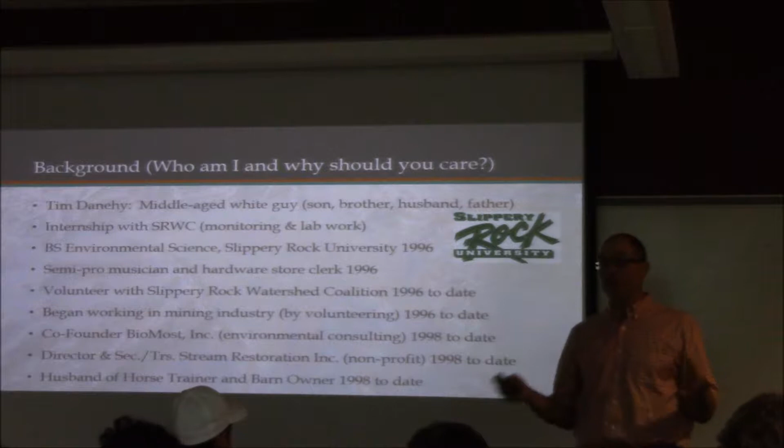I actually began my career by volunteering for a consulting company that filled out mine permits. They were doing work with the Slippery Rock Watershed Coalition, but the majority of their business was mine permit applications, so permit work, paperwork. And I just basically said, hey, I got Wednesdays off from the hardware store. I want to learn about what you guys are doing. Can I just come down and work for free? And so I did.

That gave me experience. It got me out, meeting people, and shortly thereafter they offered me a part-time job. Eventually that turned into a full-time job. My boss, and then my future business partner who I work for, Margaret Dunn, her business partner at the time decided to retire. She looked at me and said, hey, you want to start a business? I said, sure. I was 23 years old. I really didn't have anything to lose, quite literally. So we moved into her basement, bought a computer, and off we went.

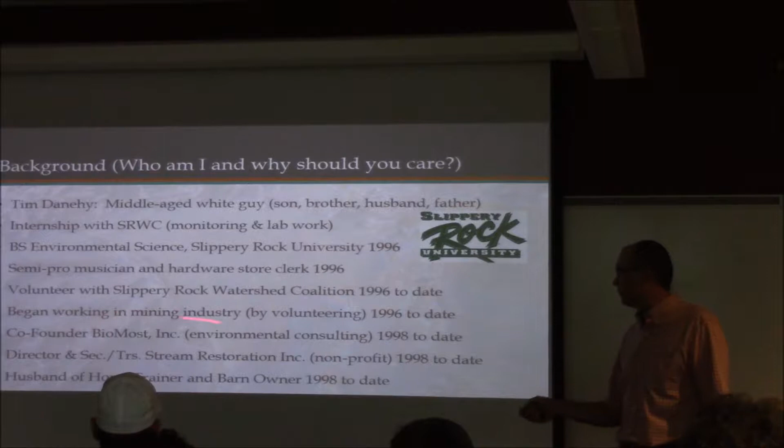I also, at that same time, she had started a nonprofit, Stream Restoration Incorporated. I became a director and secretary-treasurer for Stream Restoration Incorporated, which is SRI. That same year I got married, and my wife's family built a barn on the property, so I built a barn, started a business, got married, all at basically the age of 24. So I kind of started life in a big hurry.

Anyway, so experience, things I have done. This is a picture of our office from a number of years ago. This is myself diligently working at my desk. This is Shaun Busler, who's our biologist. Cliff Denholm, who's another environmental scientist that I went to school with.

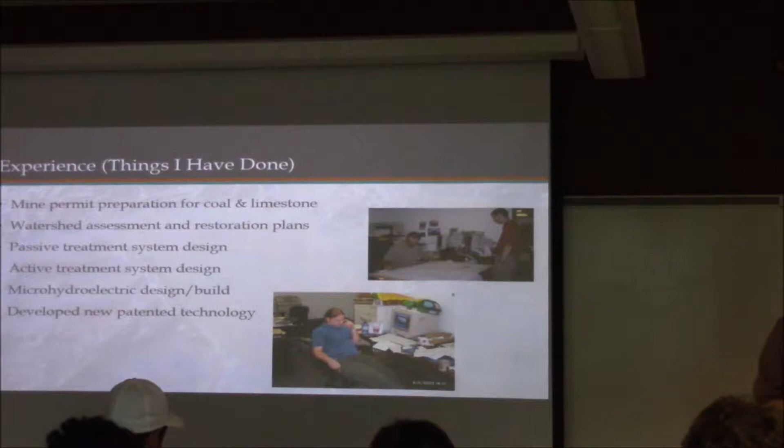We really started our business by doing mine permit preparation for coal and limestone surface mines. Okay, not underground mines. Basically they dig down, expose the coal, dig it out of the ground, and sell it. We were working for some local mining companies, Amerikohl Mining and Quality Aggregates, and as a two-person consulting company initially, that was plenty to do.

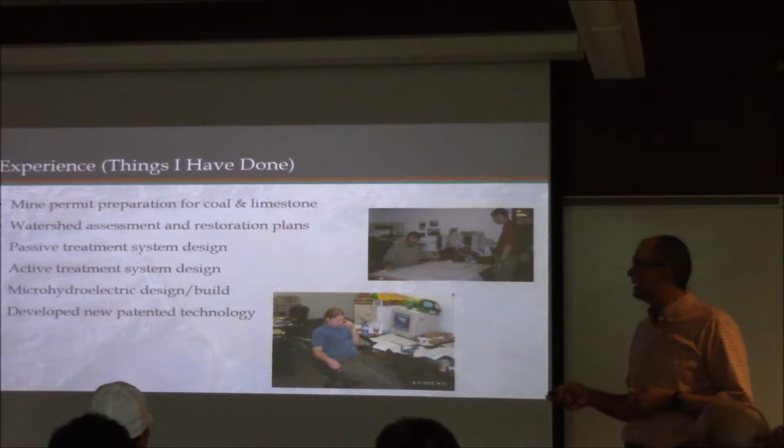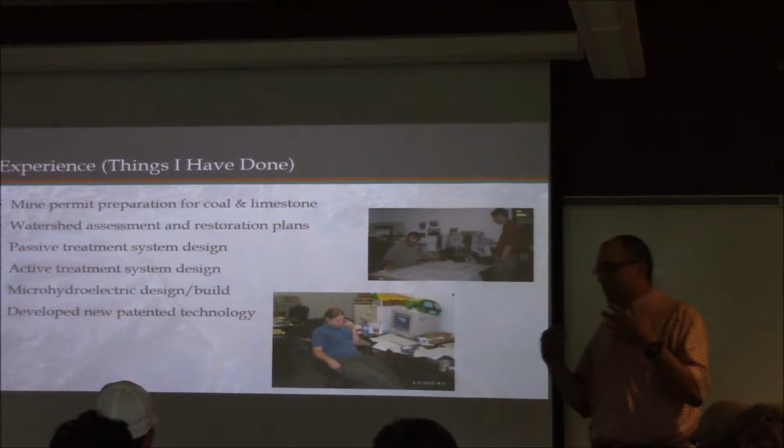Because of the impact of mine drainage, we also got into watershed assessment and restoration plans, passive treatment design, active treatment design, and eventually things kind of snowballed and we got into doing micro hydroelectric design build. Also part of what we do is basically, when we started in this, there was no textbook for passive treatment.

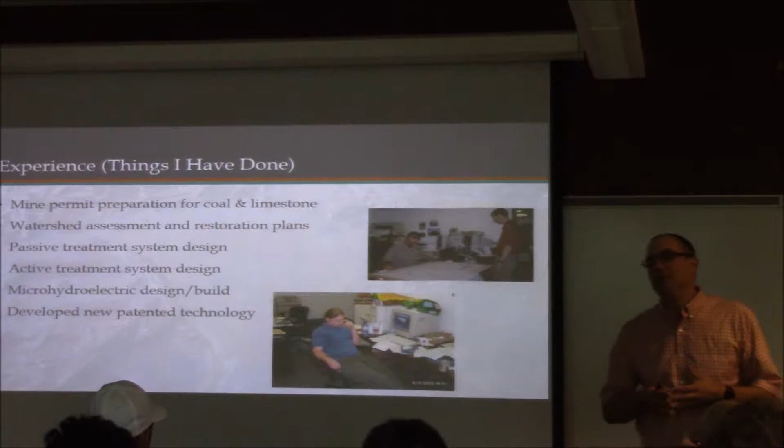I'm glad you're developing those skills in a seminar like this, when you have to listen to people other than your professors to pick up on what they're saying. Just to give you a little flavor, have any of you actually been out onto a mine site anywhere at any time? Kelsey, you can raise your hand. Okay, we got just a handful of people.

When you hear a mine site, some people relate that to something with a dramatic impact on the landscape. And a lot of abandoned mines do have a dramatic impact on the landscape. But in 1977 they passed a law that required surface mine operators to reclaim their mines, and that they would have to be responsible for any bad water that would come off of those mines. So a lot of technology was developed with surface mining, and permits that used to literally just be 3 or 4 pages back in the late 70s, early 80s, are now hundreds and hundreds of pages long.

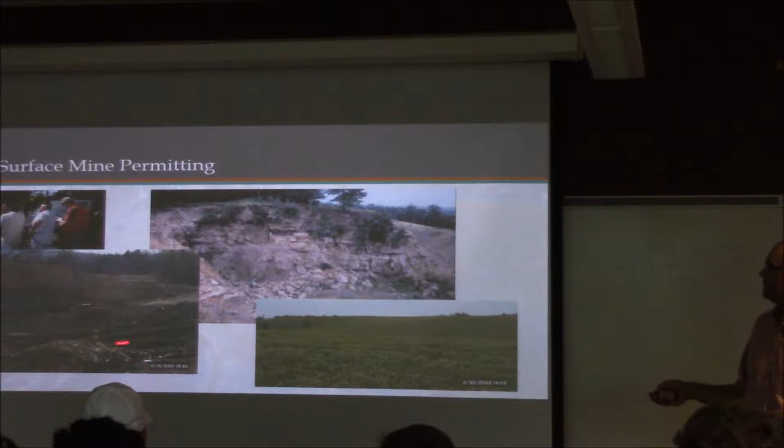So they basically dig down to get to the coal, and here's the mine actually reactivated - you see this is like a D9 bulldozer pushing the dirt out of the way to get down to the coal. Then they pick up the coal and load it on trucks and sell it to a power plant. This is 2001, when they were actively mining it. In 2003, this is reclaimed. If you drive by that site right now, you wouldn't be able to tell it's a surface mine. It just looks like any agricultural field, because the reclamation was done correctly in accordance with current laws and regulations. So just want to give you a flavor for that.

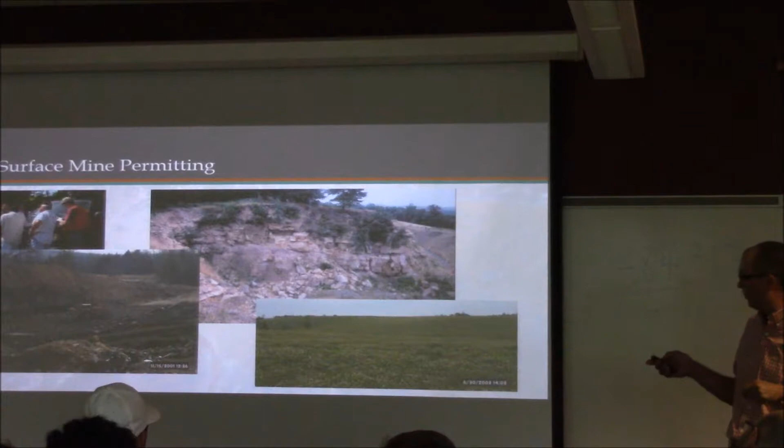Now, what's interesting - you can't quite pick it up, the resolution's not that great - this feature right here on the high wall is kind of unusual. I'll blow it up, I don't think you'll be able to really see it, but that's actually a goat, living on a ledge about 20 feet off the ground on this mine. So that's an actual goat, and he lived on the surface mine. So we destroyed goat habitat when we reclaimed this mine.

So anyway, watershed assessments and restoration plans. Here's another picture of Cliff, and this is Cliff and I out sampling at a site - this is actually out at the AMD and Art site here in Vintondale. We're out taking a look at that passive treatment system, collecting samples. Measurements are important - getting good data. If you're going to engineer something, you have to have a basis for your design. You need to know how much water you have to treat and what the pollutant load is that you have to remove. So measurement is important.

Collecting good data is very, very important, and good flow measurements are very important with a lot of mine drainage design work. There's so many times I have a lot of samples but no flow data, and people ask us to come up with a treatment design, and it's very, very difficult. We've done a number of assessments and restoration plans over the years. The first big one we did was for the Montour Run Watershed Association in 2003. This is another one we did for the federal government, the Blacks Creek Restoration Plan.

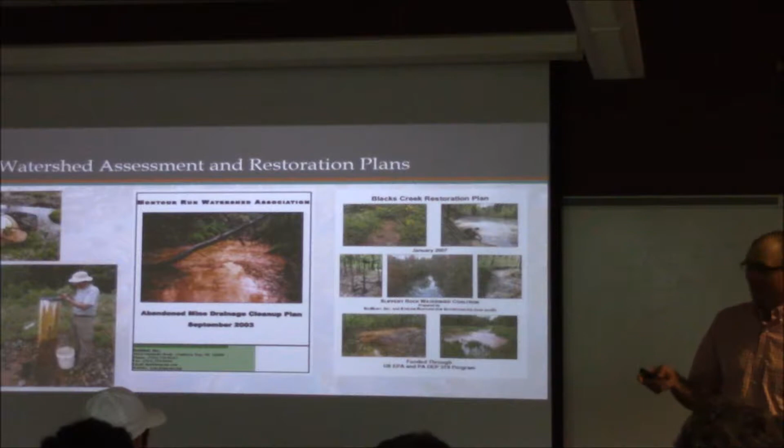A lot of this work is grant funded, working with nonprofit groups. So part of what we do is go out in the field and identify problems. That's kind of what I wanted to go to school for, because I did a shadow study in high school at an environmental engineering firm, and I saw a bunch of guys sitting at a desk working on paper and computers.

Just to go back, this is what I ended up doing with my environmental science degree. I'm sitting at a desk with a computer working on plans. I'm doing environmental engineering essentially.

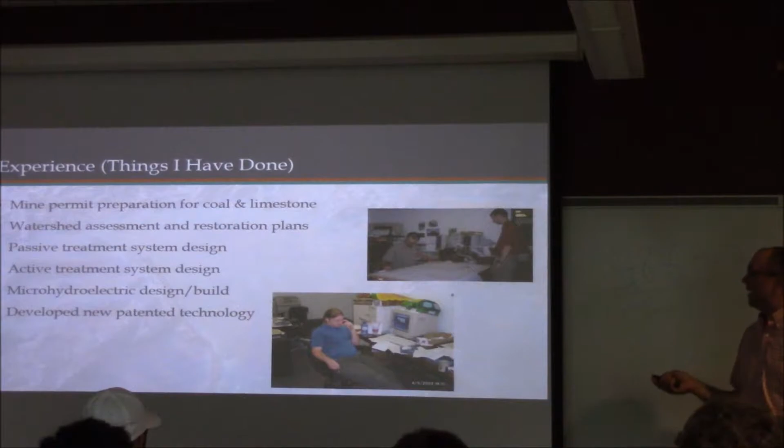What I do is passive treatment of abandoned mine drainage. Abandoned mine drainage refers to discharges that come off of mine sites.

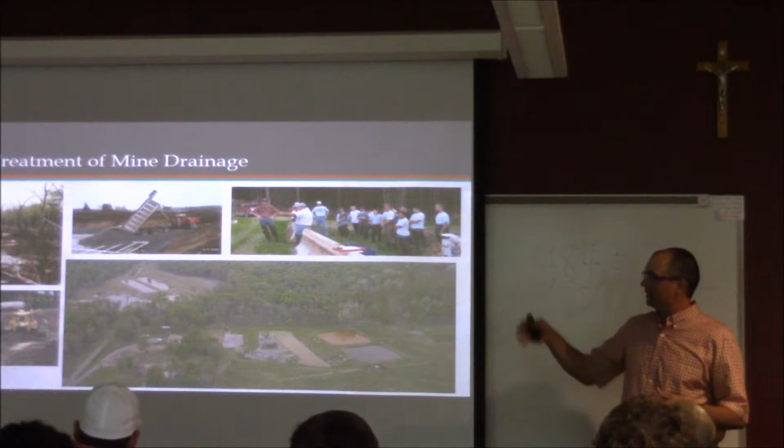Another thing we're involved in at Biomost is active treatment design, where you use chemicals and lime. We started with non-electrified active treatment systems that use water wheels to auger in lime, but we've since branched out into doing full-blown classic active treatment systems for mine drainage treatment.

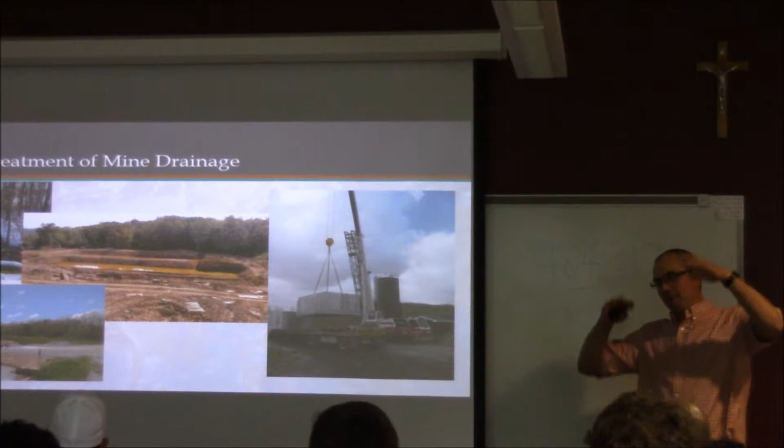Same problem: we have a seep that's polluting a stream. One reason we decided to go with an active treatment system at this site is that the seep was coming out very close to the stream, and there wasn't enough topographic relief to put in all the components needed for passive treatment. Plus, the flow at this site gets up to about 500 gallons a minute, which makes the size of a passive treatment system much, much larger.

With a passive treatment system, you have to build it for the maximum flow because you can't turn up rocks—you have to put in all the rocks at the wetland size needed right up front for it to be effective. With a chemical-based treatment system, you can always turn up the amount of lime. You still need enough settling time in your ponds, but if the flow or acidity level increases, you can increase the amount of chemical feed you use.

But it's a big construction project, an industrial type construction project. This is a 40-foot high, 12-foot diameter steel silo. That's where the hydrated lime is stored, and there's an automated augering system located at the base of that silo.

This is actually the mixing tank that we're putting in. We were using an airlift mixing tank, a 10-foot by 10-foot by 12-foot deep tank. It comes in multiple sections. We had to use a 90-ton crane to pick it up and set it down into the hole.

At the end, this is what the treatment system looks like with your lime silo. Your mixing tank is right in front of the truck, down in the ground, and then it comes through a pipe, through a flume, so we can measure flow. Then it goes into a settling pond with a baffle curtain, and there's a series of two settling ponds. This is the first one, that's the second one, and then it discharges out to the stream.

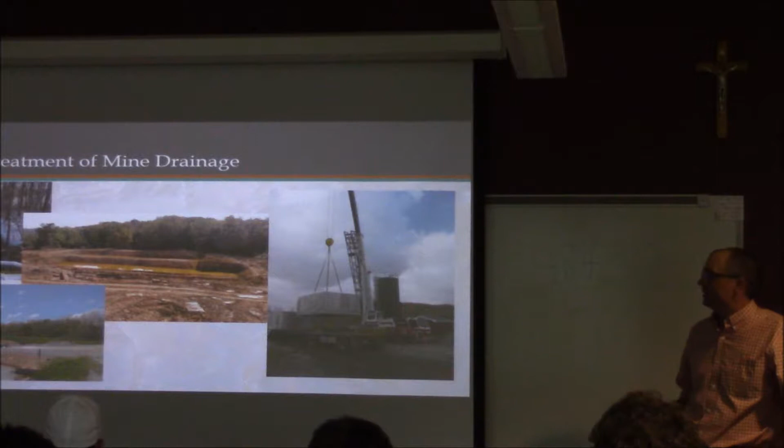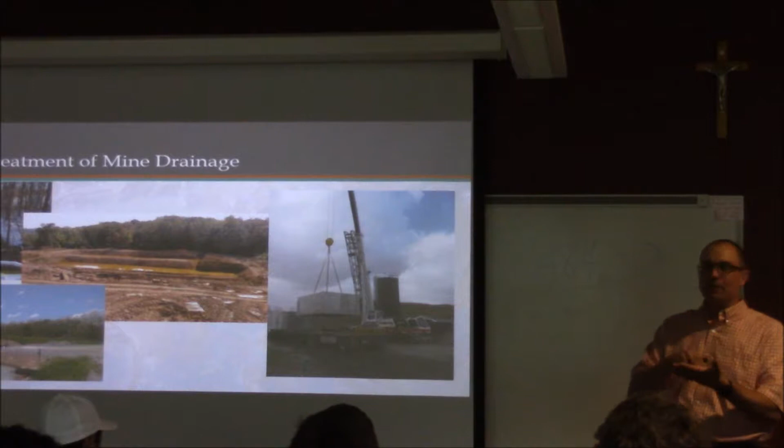With this system, we actually have an automatic pH controller. We have a pH probe right at the outlet of the first pond. That controls the speed at which the lime is fed, and we also have an ultrasonic water level meter on this flume so that we can continually read the flow. We can actually pull the site up on my cell phone and know how much flow and what the pH is right now at any time. So it's kind of neat.

Another thing that we got into is micro hydroelectric. This is a treatment plant, the Antrim treatment plant up in Tioga County, where there was a large underground mine that was mined back as early as the 1830s through about the 1940s, and then it was surface mined. It was remined through surface mining, and a mining company became responsible for the discharge, so they built this active treatment plant, which uses lime, and instead of a settling pond, they're using a clarifier, because the flow rate of this site was up to 2,000 gallons a minute.

You can remove a lot more metals in a clarifier, because it's an upflow type system, than you can in a settling pond in the same type of footprint. So basically the water comes into the plant, it's neutralized with the lime, flows out to the clarifier, flows up through the clarifier, and the clean water is discharged out to the stream.

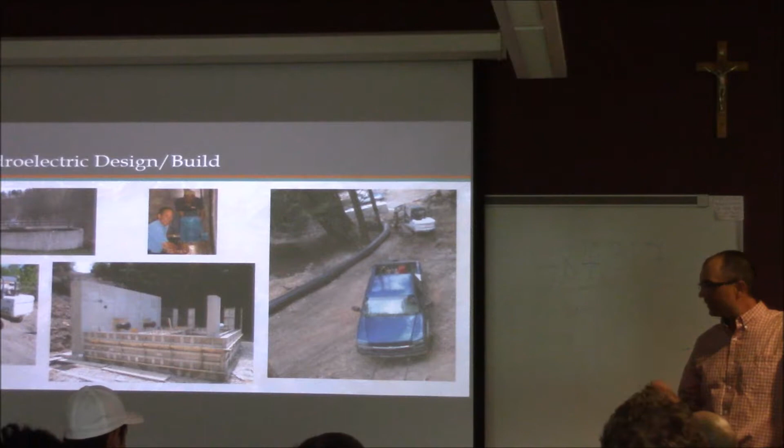There was a gentleman at the Department of Environmental Protection who was involved with overseeing this treatment plant, and he wanted to put a micro hydro turbine on this plant, because they owned property that dropped almost 200 feet down over the mountainside. With 2,000 gallons a minute and almost 200 feet of drop, you can generate a good deal of electricity. So we put in a proposal to do a design build on micro hydroelectric.

Basically all we did was put in a small pond after the clarifier and extend an 18-inch diameter high-density polyethylene pipe down over the hill, down to a powerhouse that was constructed at the base of their property. There was still another 200 feet plus of drop down below their property down to the stream, but this is as far as they own.

So we constructed a powerhouse, which was just a concrete shed that the 18-inch pipe extends from the clarifier down to the powerhouse, comes in the backside here, and then we split the flow into two different micro hydroelectric turbines.

All a turbine is, is an electric motor running backwards. There's a little bit finer nuances to the wiring, but it's an electric motor running backwards. We're taking the mechanical energy of the water coming out of the nozzle and spinning an electric motor to generate electricity, versus a pump, which takes an electric motor and puts in electricity to physically move the water. So it's basically just a pump running backwards to generate electricity.

This was the first micro hydroelectric system that used mine drainage that was connected to the electric grid. And so this was the first. We actually had to get a license from the Federal Energy Regulatory Commission, or FERC, for these turbines.

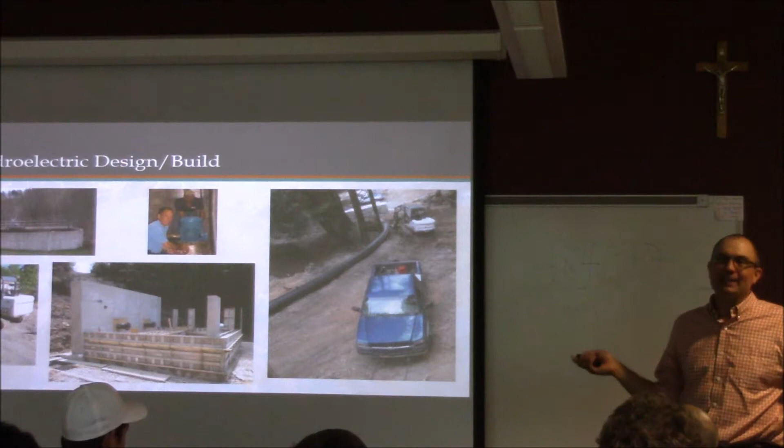Yeah. And when the FERC folks came out - they're actually based out of New York City in this area - they came out and asked to see my dam. And I was like, we don't have a dam. They're like, well, where are you getting your water? I'm like, I'm getting it from an underground mine. What is that?

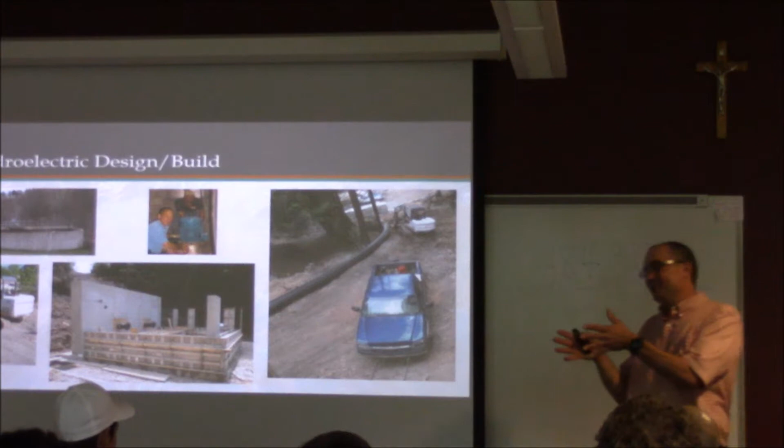So getting out and seeing things and seeing different things is an important part of education. You may have a specific interest or field that you want to focus on - that's great. But to broaden your horizons, take the opportunities you have, especially during your college careers, go out and see other things. That's a really important thing.

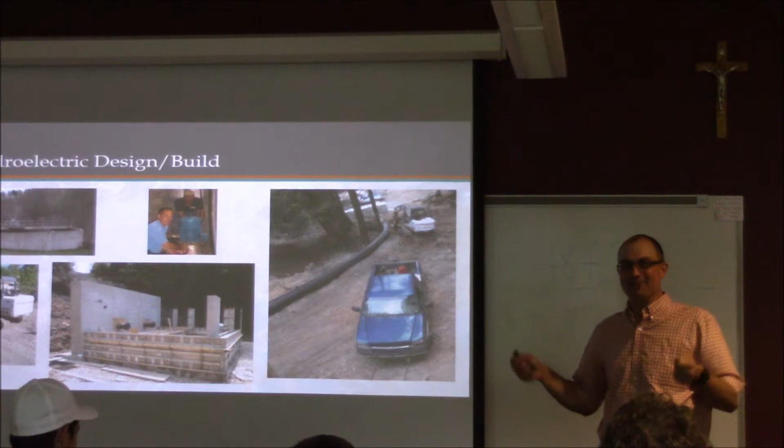Because if you have a broader understanding, you don't have to be the PE engineer from the Federal Regulatory Commission asking what's an underground mine - he had no idea what an underground mine was. So I explained that to him. And when the Dam Safety Commission part of FERC sends us our paperwork every year, we just say no dam and send it back. Every year they send us a piece of paper asking how our dam is doing, and we say we don't have one, and every year they say okay.

So those reports you're writing, that's a good exercise to get in. I'm not saying all paperwork's totally meaningless, but some of it seems that way at times. But don't get discouraged. Now, one of the more interesting parts of this project - this was a design build.

This is actually me on the excavator. This is just a little Bobcat excavator, a little 5-ton excavator, and we're dropping down over the hill. This is over a 2-to-1 slope, and we're taking this 18-inch pipe and had to put it in a trench. So we literally chained our pickup truck to a tree, put a winch on the hitch of the pickup truck, and then we're cabling down with the excavator so we wouldn't slide uncontrolled down the hill. I learned that in my aquatics plant class, how to do that.

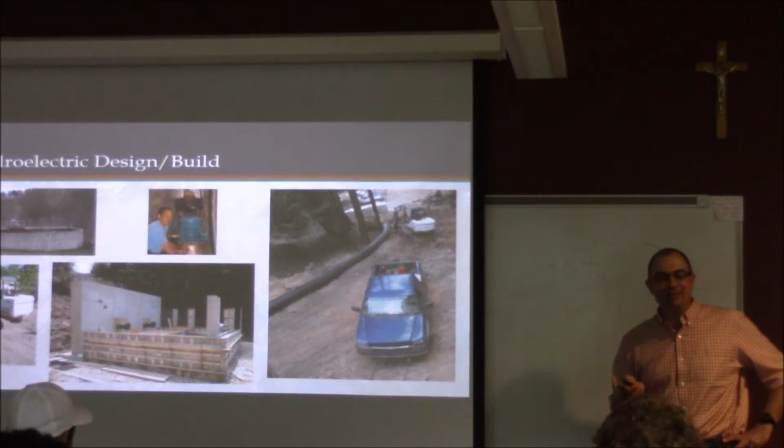But that was a lot of fun. It was an exciting day. But we got it in successfully, and everything got hooked up, and we're generating electricity. We got our license, and everything is working up there. This was one of the highlights of the things I've done so far in my career.

All right, other thing I want to talk about is new treatment technology, which I alluded to. We got into active treatment with some more low-tech solutions on active treatment systems. What we have here is just a 30-inch diameter pipe with a cap on the end - that is a mix well, okay?

People might ask what a mix well is. It's just a piece of pipe that we put down into the ground, and then we drop water down the center of it, and then we drop lime in the top of it, and it improves the mixing efficiency of the lime. I actually came up with a drawing and showed it to a couple different mine drainage treatment gurus. They both said that's not going to work. But the DEP was asking us to come up with a way to improve lime efficiency at one of their treatment sites where they didn't have access to electricity.

So I said, well, it's basically kind of the same thing as a diversion well, which was something invented decades ago over in Scandinavia, where you had acid rain coming off the European continent. A lot of granitic soils up in Scandinavia where they didn't have limestone to buffer the acid rain, so you had very acidic streams - didn't have metals in it. Basically you dump limestone in this pipe, and the water comes to the bottom, kind of fluidizes the limestone chips, and it neutralizes the acidity.

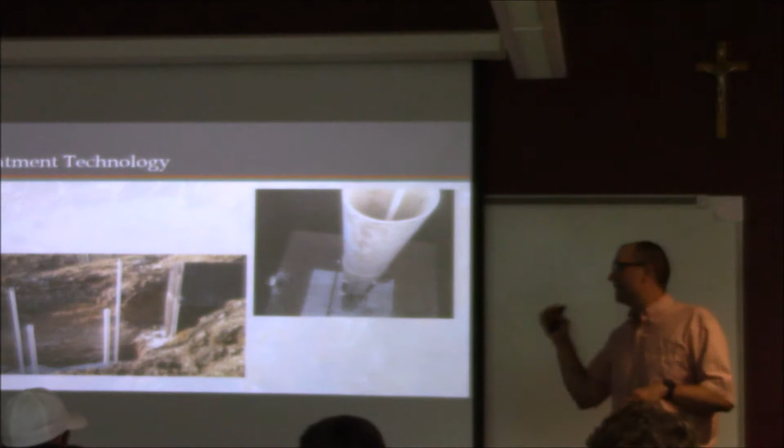Years afterward, he was working on mine drainage problems. One issue is lack of aeration, and we don't have enough physical drop to do cascade-type aeration. So the light bulb went off, and he said, I want to build a tromp. He applied for a grant to research and build one, but they didn't fund it, so he built one anyway in his backyard.

He got excited about it because it was working, and he drove the entire office out there one afternoon. We went out there, got excited about it, and went out on a mine site and built the first tromp ever used for mine drainage treatment, in Fayette County, Pennsylvania.

This tromp is actually installed just outside of Tunnelton, West Virginia, right here. So Bruce's idea of using a tromp for aeration came up during the same project where I developed the idea for the mix well. I was talking to Bruce about it, and he said, let's make an airlift mixing tank and power it with a trompe. I said, what is that? That sounds interesting.

Basically an airlift mixing tank is the same sort of thing. This is an 8 foot by 8 foot diameter tank that's 10 feet deep, with a 12-inch diameter PVC pipe supported off the bottom with 3 small stainless steel legs, about that far off the bottom. An air line comes down and discharges just inside the bottom of that pipe. The bubbles come out and reduce the density of the water.

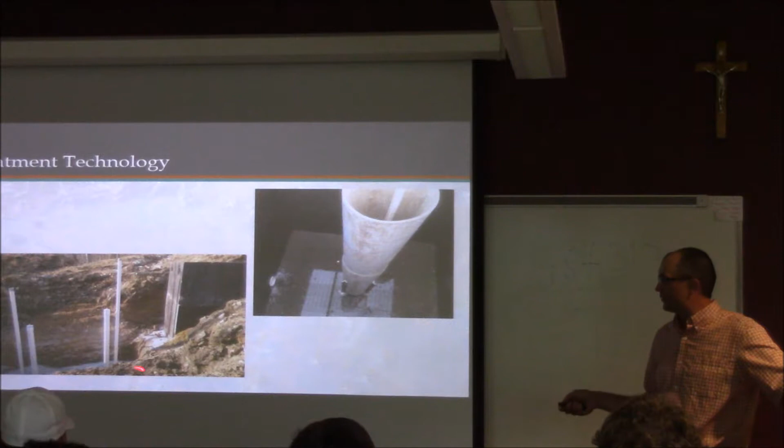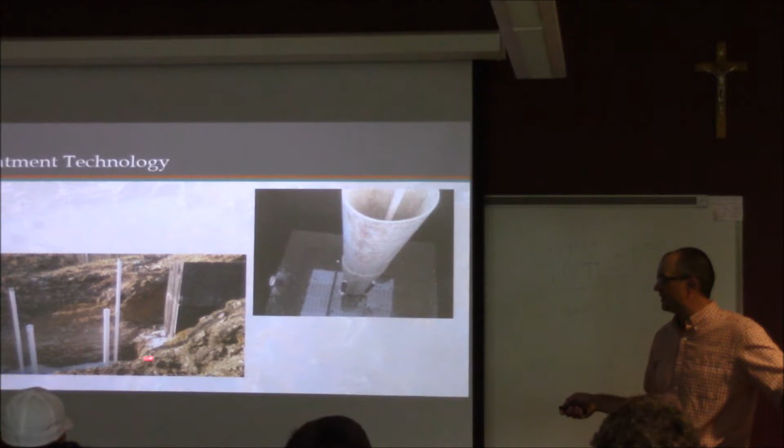The water comes out, goes down the trompe, and compressed air is captured in these air chambers, one at the inlet and one on the outlet side. This is the outlet of the trompe. There's about 4 feet of difference from the inlet to the outlet. This is 4-inch PVC pipe down to 6-inch PVC pipe, back up at 4-inch, comes out, and it generates the compressed air to power the airlift.

This is us installing it. This is the mix well being put in the ground. People don't get excited about the mix well, even though it does about 60% of the mixing in this dual-step mixing process. I'll show another picture. This is the tank here, the airlift mixer tank, so that 12-inch diameter pipe is in the center of that thing.

This is the trompe, just looking from the other side. These black pipes coming up are the air lines coming from the air chambers going into the mixer tank. The pipe comes out, goes down through the trompe, and then the discharge of the trompe goes down into the settling pond.

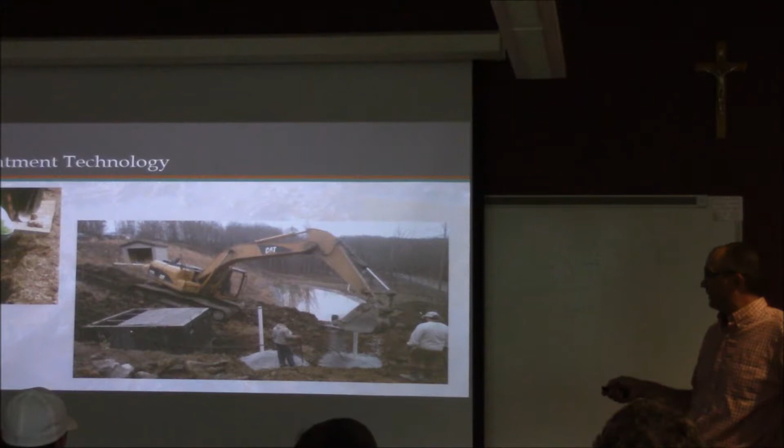This is a picture of the actual mix well itself. We pull off a little bit of the water to run a tipping bucket inside the silo, which distributes the lime. It falls down into this sluice, just a piece of culvert pipe cut in half, which drops it into the mix well. Then the rest of the water, about 120 gallons a minute, comes in through the 6-inch pipe and goes down the center, so the heavy particulates get retained at the bottom until they have a chance to dissolve and grind.

It's an autogenous grinder. They just grind against themselves, and the finer particulates eventually make their way up out of the mix well. And so we reduce the particle size of that calcium oxide lime.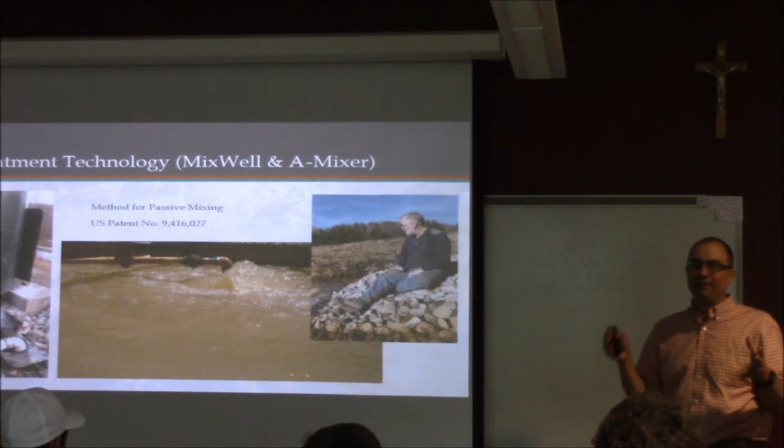They built these giant air compressors in South America, Canada, the United States, essentially all over the world. And that technology has basically been forgotten. There's still an operating trompe up in Peterborough, Canada, where they actually use the compressed air to open and shut a lock and dam. So this technology is still being used, installed over 100 years ago, designed back without the advent of electricity or that sort of thing. It's pretty amazing stuff, and there's a lot of possibilities for this.

You can generate about 4 CFM of air for every 100 gallons a minute that you have, which is kind of neat.

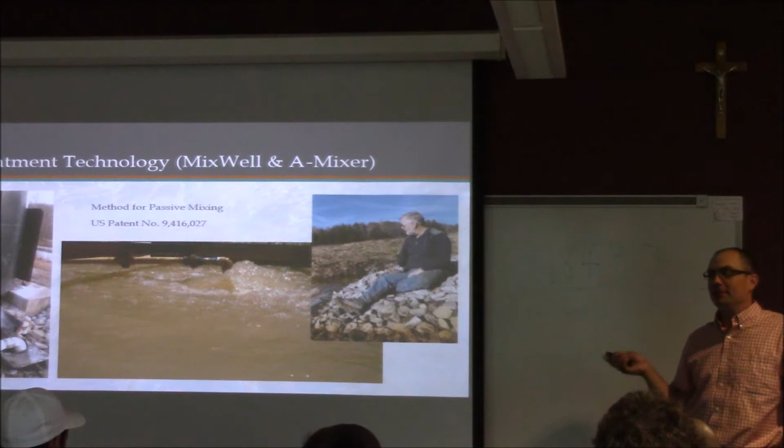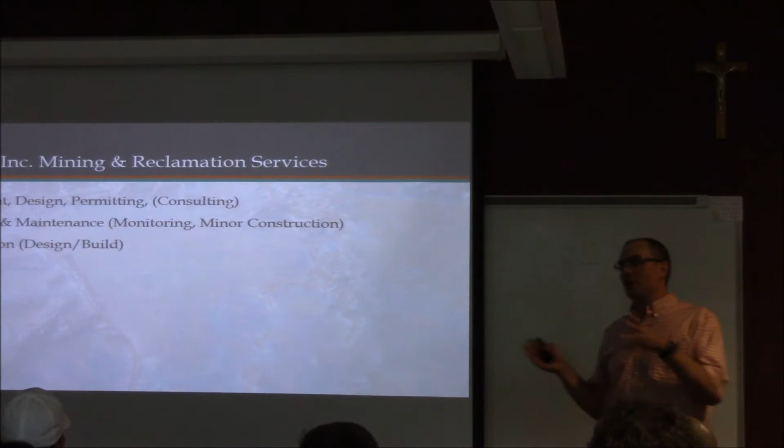So to talk a little bit about what my company, BioMost, does, we describe ourselves as mining and reclamation services. We do assessment, design, and permitting, and that's kind of the consulting side, which is how we got our start. And then these treatment systems that we designed, we put them on permitted mine sites where clients had to meet permit effluent limits, making sure they don't discharge water with too much iron or too high of acidity into the stream. So they asked us to do the monitoring and maintenance of these passive treatment systems.

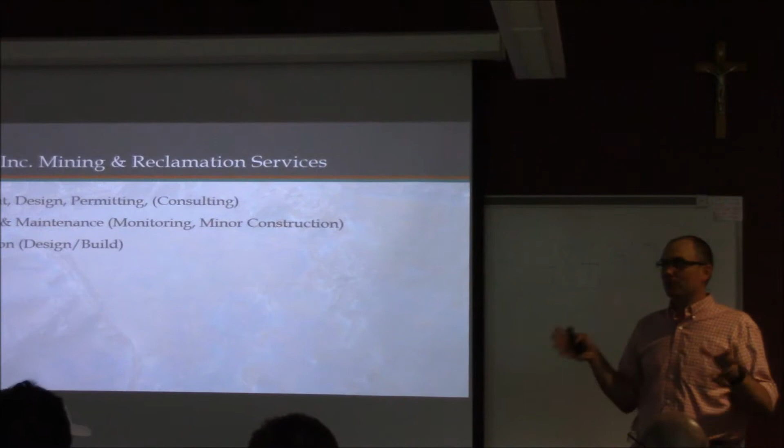So we ended up renting some equipment and eventually bought some equipment and started doing some minor construction type work for the maintenance of these passive treatment systems. And that led into doing full-blown construction jobs. The micro hydroelectric was the first real construction job we did, and then we've since built some large, full-scale passive treatment systems here in Pennsylvania and also in Oklahoma. I'll be talking about the Oklahoma project here shortly.

Here's the Southeast Commerce Passive Treatment System. This is a very exciting project for me to be involved in. I was very honored, because one of the guys that literally wrote one of the early benchmark papers on passive treatment is Dr. Robert Nairn, who has instructed a number of professors in this room.

I think you know Dr. Bill Strosnider and postdoc Julie LaBar. And he has a great graduate program, makes master students. My environmental engineer, Buck, who's spoken at the seminar in the past.

And these two guys—Dr. Nairn kind of started a center, Center for Watersheds. So he taught Dr. Strosnider, and Dr. Strosnider is learning what Dr. Nairn taught him and building on it here, great. So you're like first generation Nairn, and you guys are like second generation Nairn. Anyway, he had been working down in Oklahoma.

This is Commerce, Oklahoma, home of Mickey Mantle. This is actually the Mickey Mantle memorial statue right here. This is Commerce High School, with its football field and baseball field.

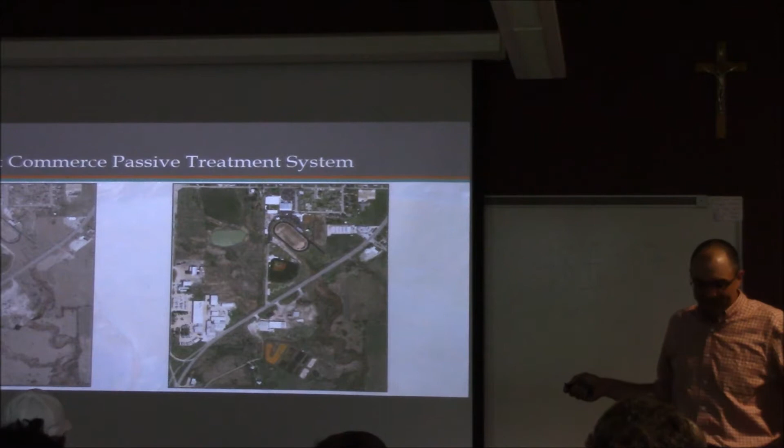About 10 years ago, they installed one of the first passive treatment systems in Tar Creek—actually the first passive treatment system in Tar Creek. This is the Mayer Ranch site. Up here, there was a reclamation project done by the state of Oklahoma. There were two subsidence holes, red hole and green hole, that they backfilled. But there was about 100 gallons a minute coming out of those holes.

When they backfill them, the water has to come out somewhere—that's good engineering practice. If you have flowing water in a natural system and you don't attend to that or provide a way for it to flow and continue doing what it wants to do, it will find a way out. After they backfilled these holes, they actually dug a pond and used fresh dirt to backfill those holes, and then there was just a whole mess of red water that came out along this area uncontrolled.

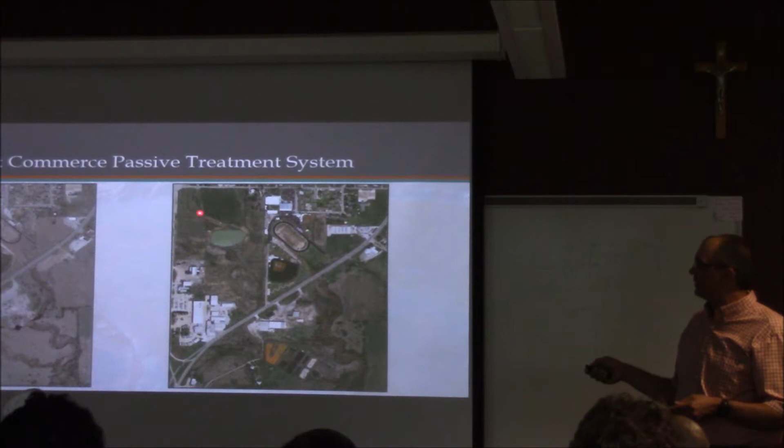So the city of Commerce and the state of Oklahoma came in and put in a French drain system, piped it down to a culvert right here. That's what the University of Oklahoma started monitoring in order to eventually put in a passive treatment system.

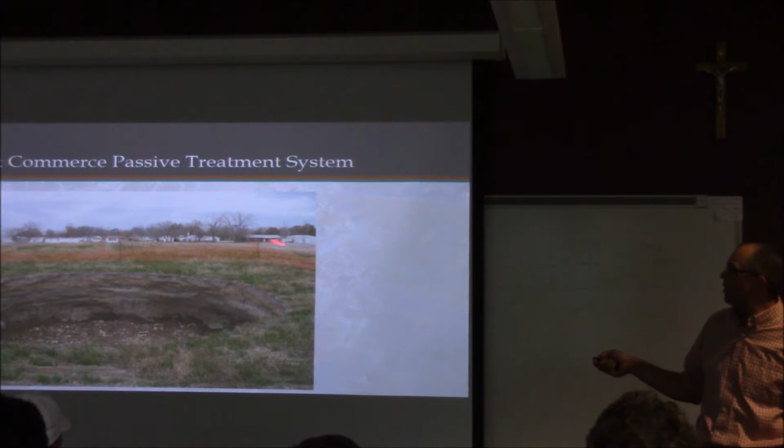This is actually a subsidence. After they backfilled the first two holes, Dr. Nairn went up there on Thursday, I believe, and saw that there was a new subsidence hole that had formed. So they had to fence off the area, and there was red water coming out down below.

So one of the things Dr. Nairn did is he used his grad students to monitor the Southeast Commerce Passive Treatment System. I'm not sure if you can recognize this guy, but that's Dr. William Strosnider measuring the flow. They piped the 100 gallon a minute discharge into the side of the culvert so you couldn't see it coming out anywhere, and this culvert extends below the Commerce High School football field. That's Dr. Strosnider during his grad research days monitoring the Southeast Commerce discharge.

I'm not sure who that is. I don't think it's your wife. Okay.

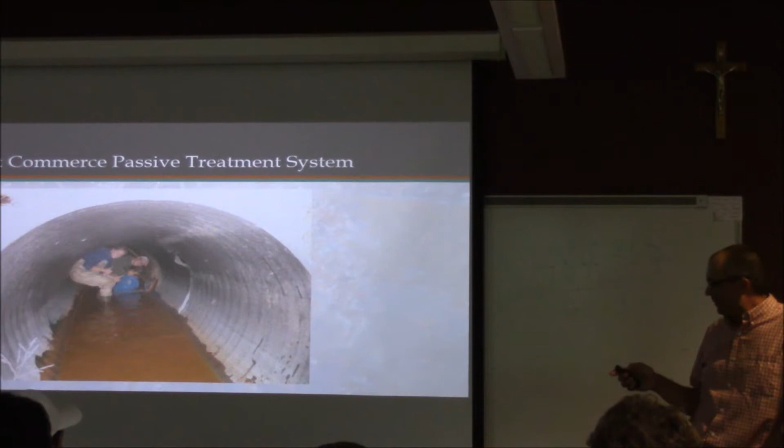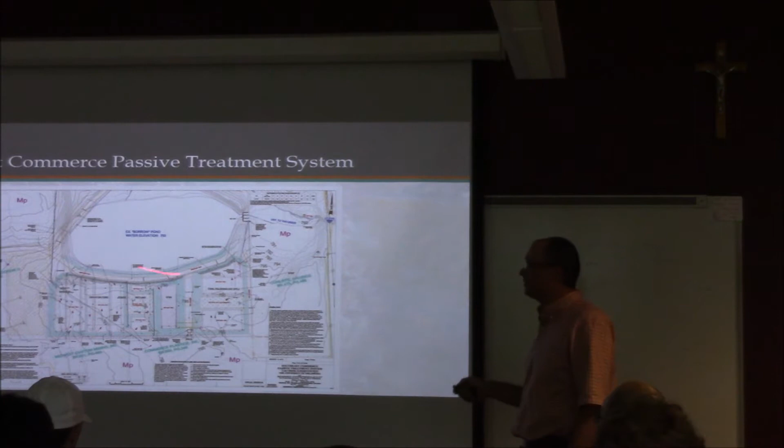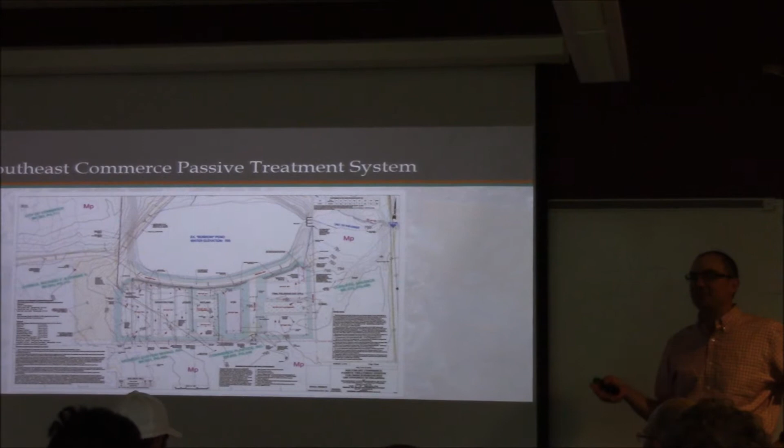It's basically an oxidation pond to remove the major pollutant, which is iron, about 130 to 140 milligrams per liter, but there was also about 6 or 7 parts zinc, about a part of lead in this water, and some cadmium and other nasties that we normally don't have to worry about in Pennsylvania. Down here, because this was the lead and zinc mining district, those pollutants are present in the water. The water flows around baffle curtains.

And through a wetland shelf into a vertical flow bioreactor, which is just a mix of primarily wood chips and spent mushroom compost. That flows into a re-aeration pond, another wetland shelf, a final polishing pond, and then back out to the stream.

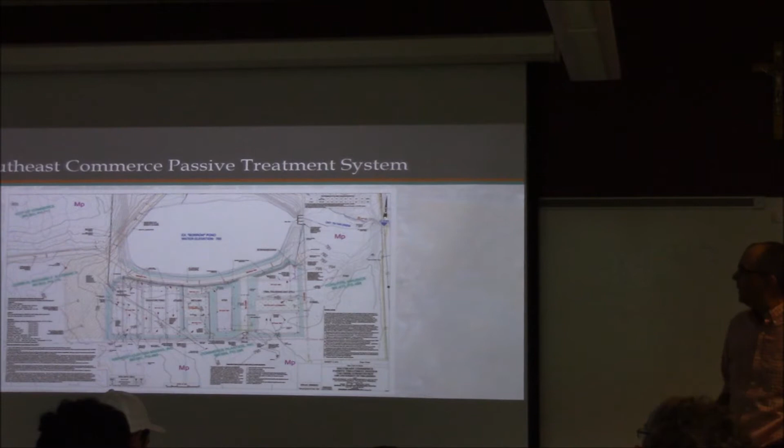So these are engineering designs. This is, learn AutoCAD - everybody, you have to learn your drafting programs, learn GIS. We use those regularly. Every day I have 4 computers with AutoCAD on them and they all get used. It's a really important design tool, so if you have a chance to take an AutoCAD class, it would be ridiculous not to if you want to be an environmental engineer, or do any sort of engineering.

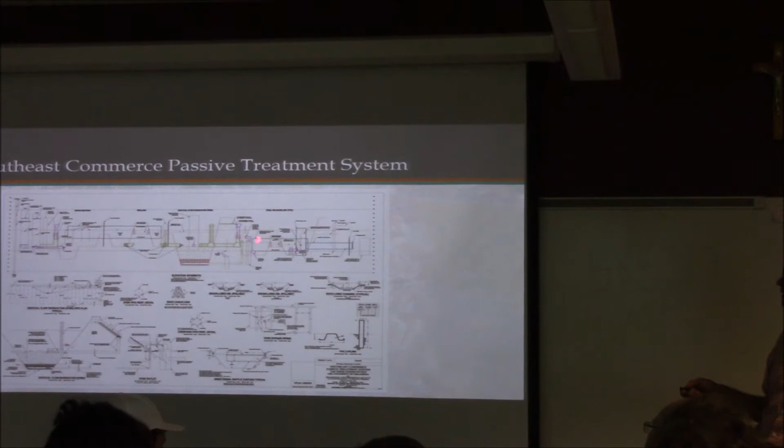So this is just an elevation schematic showing the water flowing through the system, coming out from the collection system into the oxidation pond, wetland shelf, vertical flow bioreactor, into the re-aeration and polishing units, and then out to the stream. These are some of the details that were part of our design.

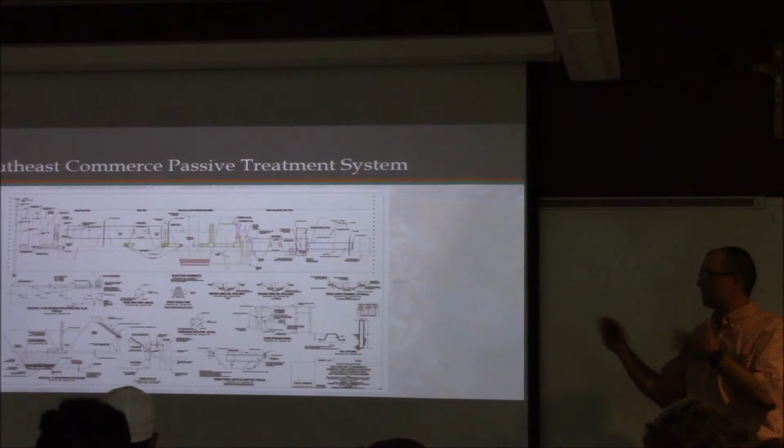So that is what we do. We come up with the ideas, we have to visualize what those pipes will look like, what they'll be doing, and then make a drawing that conveys that to a contractor - which in this case was essentially ourselves - to be able to construct the treatment system. This is some photos of the actual construction.

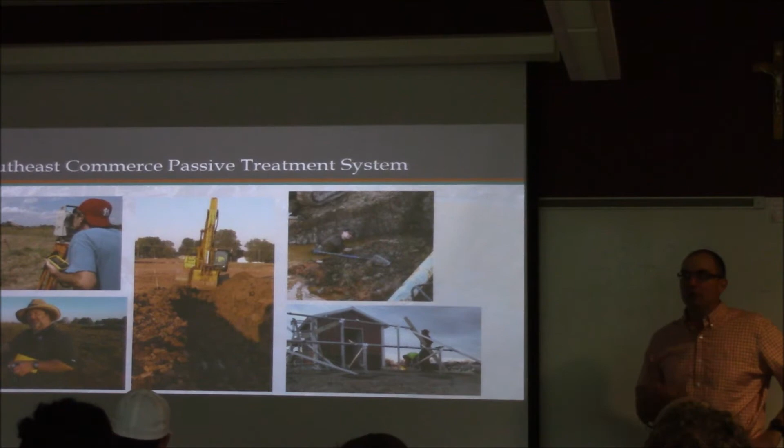As part of this system, we wanted to do an aeration step, but to put in a trompe you typically need about 1 meter of drop - that's about the entire topographic relief in the state of Oklahoma. So we weren't able to put in a trompe, but we were able to put in a small 3,000 watt solar system to power small electric blowers used for aeration in the Southeast Commerce Passive Treatment System.

This is just a picture of Buck. This is as we're deploying these floating lift aerators, as I call them.

These are the baffle curtains, and these are PVC Z-pilings that we used. The site was so tight that we couldn't use up treatment area for embankment, so we had to come up with some creative ways to overcome the limited space.

This is a picture of the 12-panel, 3,000 watt solar-powered system with a battery bank inside the shed, electric blowers. One blower runs the aerators in the final polishing unit, the oxidation ponds. The other blower is actually used as a vacuum, because when you use a bioreactor, reacting sulfate with bacteria, you get hydrogen sulfide gas.

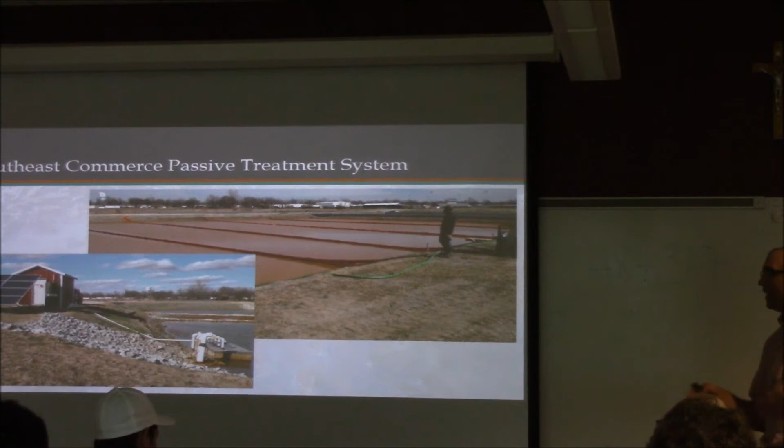It stinks a lot. We're literally right next to the high school football stadium. So we came up with some new ideas on how to control that hydrogen sulfide gas, and this is actually an activated carbon tank, where the gas gets sucked up and goes through an activated carbon tank.

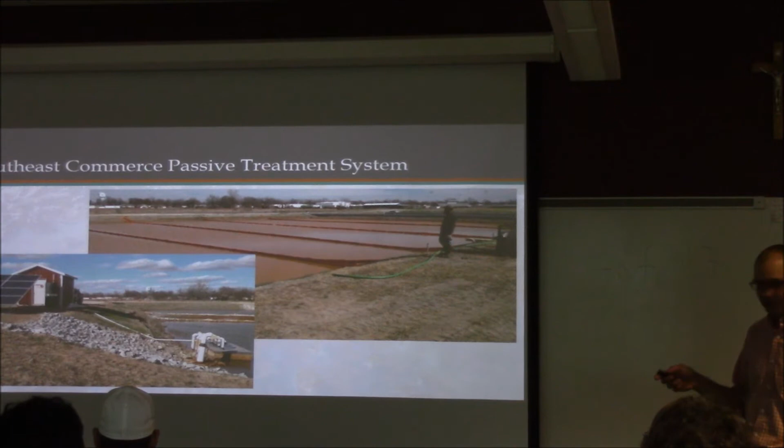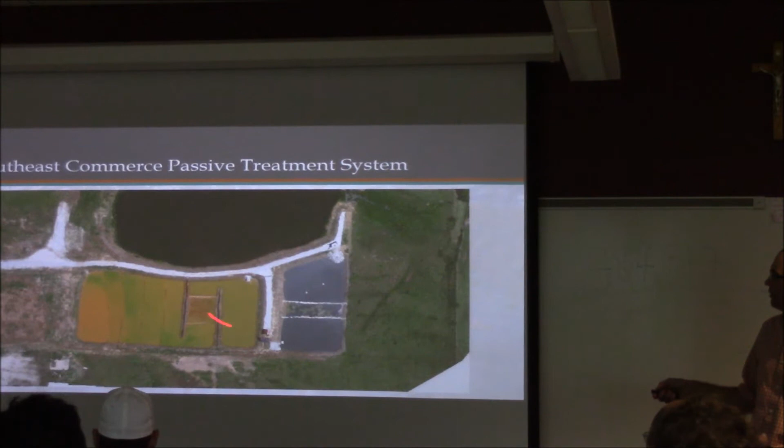So this is what the system looks like from the air. This is our temporary dirt stockpile area, the oxidation ponds, into the vertical flow bioreactor, and then the final unit, and then out to the stream and down underneath high school property.

So one of the things that I enjoy is being able to share what I know, and it's a great opportunity. Actually, Dr. Strosnider called me up one time: Tim, you need to hire a student of mine, she needs an internship, you need to do it.

I'm like, I'm too busy, I don't want to have blah blah blah. He's like, just do it. So I did, so I listened to your professor. And so I hired Kelsey for a summer internship.

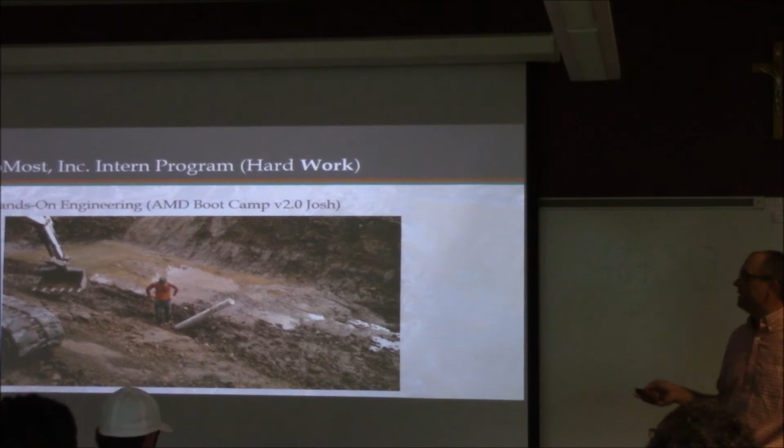This is actually constructing a full-scale passive treatment system. It was a smaller treatment system, but still a full-scale passive treatment system on a bond forfeiture site, an old surface mine in Pennsylvania. This is, okay, now we have Courage.

This is Cam, and I have a guy working for me now called Cal. Having Cam this summer and then hiring a guy named Cal is very, very difficult. I'm going to call you Cal and call him Cam. It's just weird.

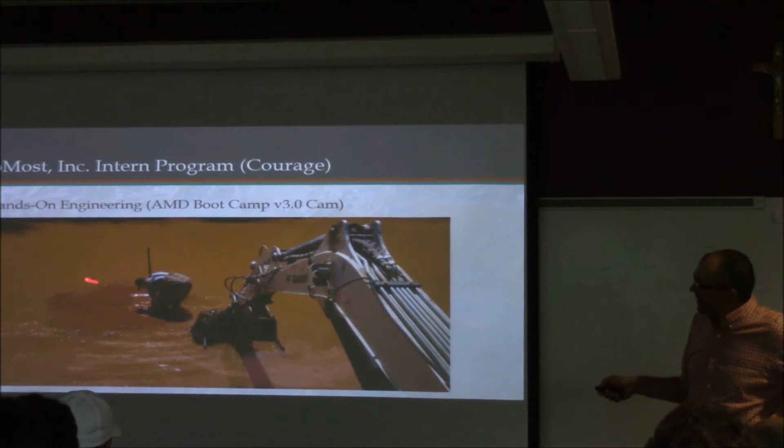So this is Cam locating an outlet pipe at a passive treatment system just outside of Penn Run, PA. Ryan, who's our main O&M guy, lifted Cam out so he could find the pipe, and it's a 10-foot drop on either side of that pipe. But they eventually found the pipe, opened it up, and got the passive treatment system working.

And then we also have a postdoc internship program at BioMost. We had our version XP, Dr. Julie LaBar, who got out there and, this is her just removing old silt fence at a treatment site where we're doing some upgrades to it.

This is her running our track loader. This is her being stuck, I think within 5 minutes? Like 10. Okay, 10 minutes of running the track loader. But she has her seatbelt on, she's in a rollover protection system, so she's perfectly safe, everybody. No harm came to Julie.

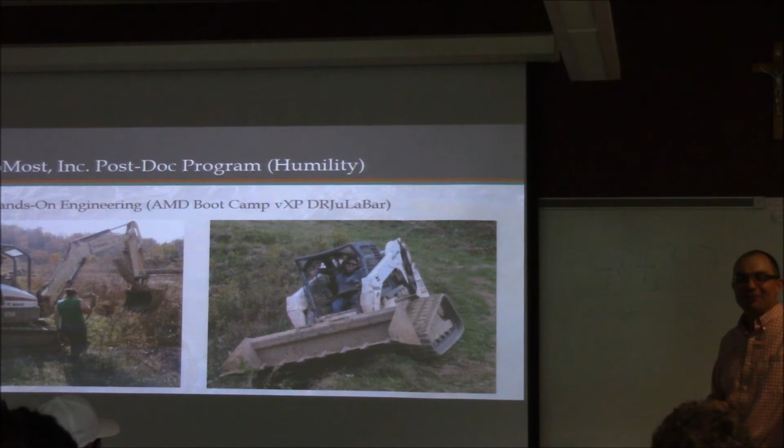But she was a huge help the fall before she started the postdoc program here at St. Francis. Enjoyed having her around. We have a partnership, BioMost, based on Bill's vision, we have a partnership with St. Francis, we're doing work with your center.

So the next step, one of the things Dr. Wagner asked me to talk about is what's next for Biomost. The big thing for us is we want to maintain our reputation for quality work. There are engineering firms out there known for not so great quality work, and that's unfortunate.

As an engineer, you have a code of ethics to follow. There are people out there that, based on what they design, don't work because they don't know what they're talking about, essentially. And you can run into that. I mean, that's a real thing. There are engineering firms out there that do that.